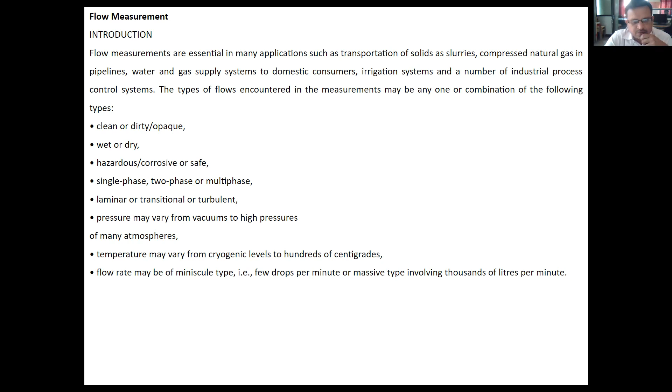The types of flows encountered in the measurements may be any one or combination of the following types: clean or dirty, opaque, wet or dry, hazardous, corrosive or safe, single phase, two phase or multi-phase, laminar or transitional or turbulent.

Pressure may vary from vacuums to high pressures of many atmospheres. Temperature may vary from cryogenic levels to hundreds of centigrades. Flow rate may be of minuscule type, that is few drops per minute, or massive type involving thousands of liters per minute.

Please mute your mic. Mhm.

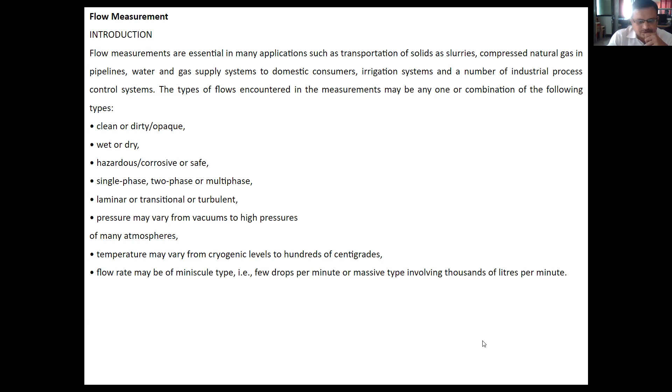Okay, this is nothing but flow rate. The selection of a particular flow measuring equipment depends primarily on the nature of the metered fluid and the demands of the associated plant. For example, an aircraft fuel meter requires to be compact and must not be affected by the changes in orientation, but has to handle only a clean and non-corrosive fluid.

On the other hand, many industrial flow meters have to work with fluids which may be corrosive in nature or may contain foreign matters, but the equipment may be relatively large and of fixed type. Additionally, the other factors that govern the choice of a particular flow metering device are the various performance parameters like range, accuracy, repeatability, linearity, dynamic response, type of output like analog, digital, etc.

Further, another requirement may be to indicate or record the rate of flow, total flow, or maybe both these quantities. Flow measuring devices generally fall into one of the two categories, namely primary devices or quantity meters and secondary devices known as rate meters. The distinction between the two is based on the character of the sensing element that interacts with the fluid flow.

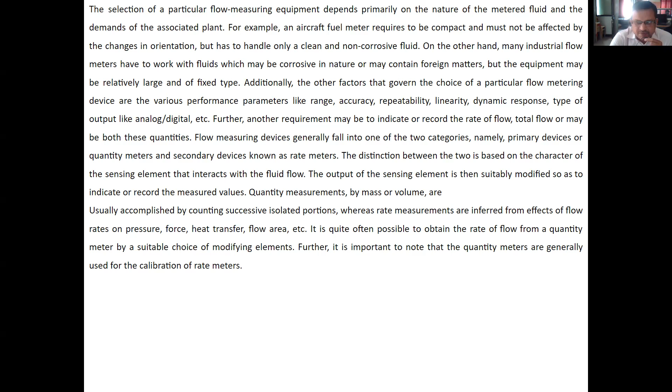Now, the first flow measuring device we will see is positive displacement meters. The term positive displacement meter is applied to a flow measuring device so designed that the metered fluid is repeatedly filled and emptied from a space of known volume. The principle of this measurement is that the liquid flows through a meter and moves the measuring element that seals the measuring chamber into a series of measuring compartments, each holding a definite volume.

Each element is successively filled from the flow at the inlet and emptied at the outlet of the meter. In other words, positive displacement meters chop the flow into pieces of known size and then count the number of pieces. Positive displacement meters are widely used in low flow rate metering applications where high accuracy and repeatability under steady flow conditions are required. Further, they are easy to install and maintain and have moderate cost.

These types of meters are generally used by the water and oil undertakings for accounting purposes. However, since there are moving parts in these devices, the wear of the components may alter the accuracy. Therefore, these instruments need calibration adjustment over an interval of time. Another limitation of such meters is their suitability to clean fluids only. Further, these devices are generally flow totalizers and do not give instantaneous rate of flow.

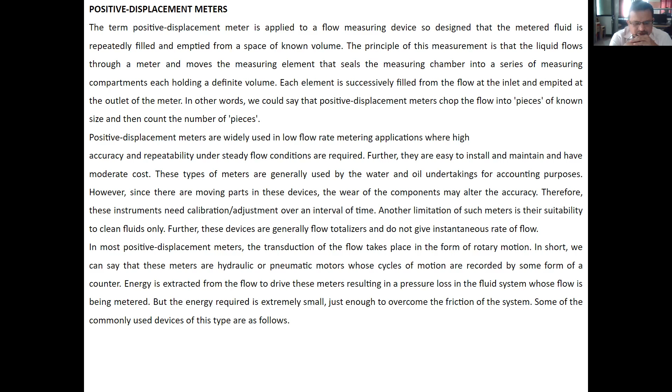In most positive displacement meters, the transduction of the flow takes place in the form of rotary motion. In short, these meters are hydraulic or pneumatic motors whose cycles of motion are recorded by some form of a counter. Energy is extracted from the flow to drive these meters, resulting in a pressure loss in the fluid system whose flow is being metered. But the energy required is extremely small, just enough to overcome the friction of the system. Some of the commonly used devices of this type are as follows.

This horizontal plate is there. It is going to be horizontal, and water will flow from this side to that side, or to the outlet side. Therefore, the nutating disc meter shown schematically in figure 5.22 consists of an eccentrically mounted disc which nutates or wobbles in the metering chamber which has spherical sides.

The liquid enters the left side of the meter alternately above and below the disc, forcing it to rock in a circular path while rotating about its own axis. Thus, the liquid from the inlet causes the disc to nutate before it goes to the outlet. Means what? What is happening? When the liquid enters, this disc is going to nutate, or it will start rotating about its own axis. That motion is also known as wobble motion. Wobble means it may be an eccentric type of motion.

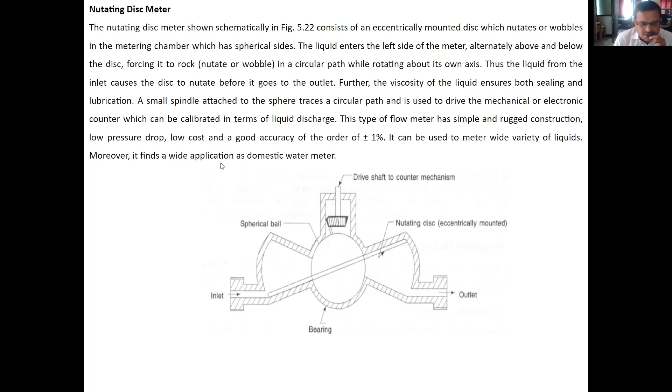The metered liquid entering the inlet revolves the rotor and the vanes around the cam, causing the vanes to move radially. The vane nearest to the inlet port begins to move outwards and becomes fully extended at point A, shown in figure. The vane ahead at point B is already fully extended, and thus a measuring chamber of known volume is formed between the two vanes and the meter body.

A continuous series of chambers at the rate of 4 per revolution are formed, which deliver the flow at the outlet. This type of meter has low pressure drop and can give an accuracy of the order of plus minus 0.2% of the measured values. An important application of the sliding vane type meter is its use as a positive displacement pump, which can cause the flow rate and measure it simultaneously. Such a pump is routinely used for dispensing petrol, diesel, or compressed natural gas in fuel filling stations.

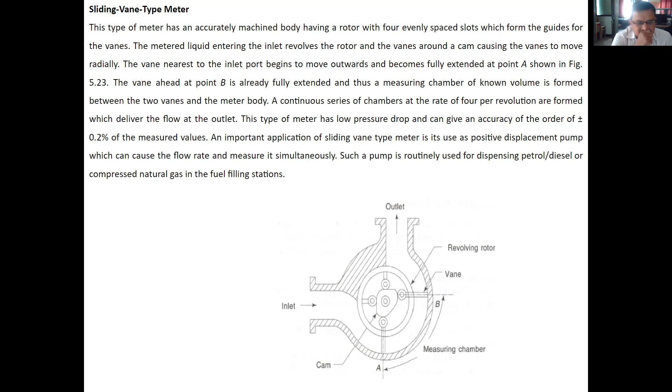The incoming fluid is trapped between the two rotors and is conveyed to the outlet as a result of the rotation of the rotors. For every rotation of each rotor, the swept volume corresponding to twice the area A, shown in figure, is passed through the meter. Thus, the number of revolutions of the rotor gives an indication of the volumetric flow. Since the speed of rotation is proportional to the volume flow rate, the rate of flow display can also be obtained by monitoring the speed of rotation of one of the rotor shafts.

The rotations of the lobed impellers can be monitored by magnetic or photoelectric pickup. The frequency of the output is proportional to the flow rate, and the electronic integrating circuit gives the totalized flow. Alternatively, the rotations are counted by connecting them to mechanical registers. Meters of this type are available for pressures up to 60 atmospheres for flow rates ranging from 10 to 10,000 cubic meters per hour. Within these flow rates, the meters have an accuracy of plus minus 1% over a range of 10 to 100% of the rated capacity. Further, these meters have low pressure drop of the order of 50 mm of Hg at the rated capacity.

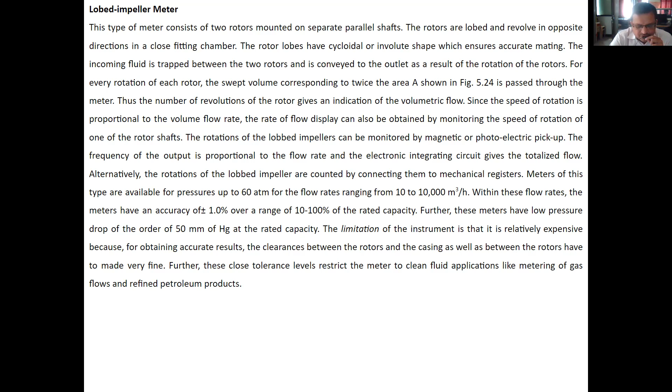The limitation of the instrument is that it is relatively expensive, because for obtaining accurate results, the clearances between the rotors and the casing as well as between the rotors have to be made very fine. Further, these close tolerance levels restrict the meter to clean fluid applications like metering of gas flows and refined petroleum products. So, this is the lobed impeller meter. Now, special methods. We'll see these special methods and then we'll stop.

There are certain flow measuring devices that cannot be strictly categorized as fluid mechanical types of primary flow measuring devices or the indirect type of rate flow meters. Therefore, these are discussed as special type devices where the principle of operation is generally non-fluid mechanical in nature. For example, ultrasonic time delay technique, electromagnetic effects of fluid flows, heat transfer from heated wires, Doppler frequency shift of scattered light, etc. are some of the principles used in the measurement of fluid flow parameters.

Ultrasonic flow meters. The operating principle of this type of instrument is based on the apparent change in the velocity of propagation of sound pressure pulses in a fluid with a change in velocity of the fluid flow. In practice, we employ short bursts of sinusoidal pressure pulse whose frequency is above the audio frequency range, that is above 20,000 Hz. A typical frequency may be of the order of 10 megahertz, that is 10 raised to 7 Hz. Here 7 has been written, sorry.

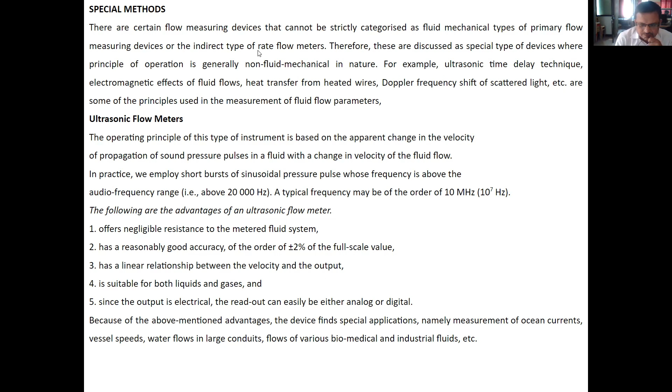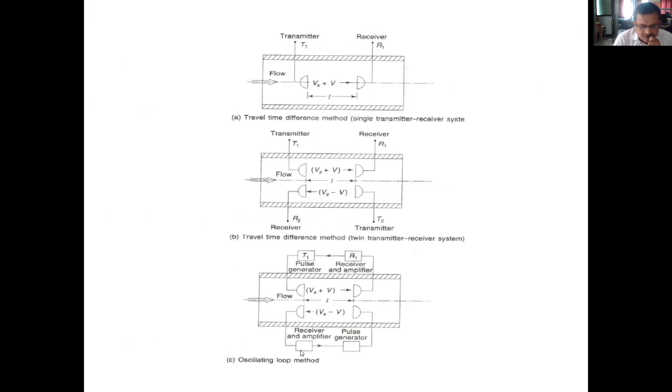In the electromagnetic flow meter, rate of flow may be determined for electrically conducting fluids by measuring the EMF induced across the fluid stream when it passes through the magnetic field. This technique cannot be used for electrically non-conducting fluids like gases. However, it gives quite satisfactory results for fluids with as low conductivity as water. The principle of operation of the unit is directly analogous to Faraday's law of electromagnetic induction for solid conductors.

The law states that whenever a conductor cuts lines of magnetic field, an induced EMF is generated, and the magnitude of this EMF is proportional to the rate at which these lines are cut, and the EMF is perpendicular to the plane of conductor and the magnetic field. The direction of the induced EMF is given by Fleming's right hand rule.

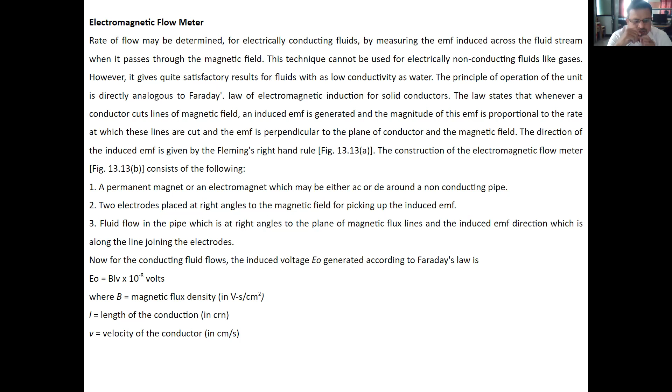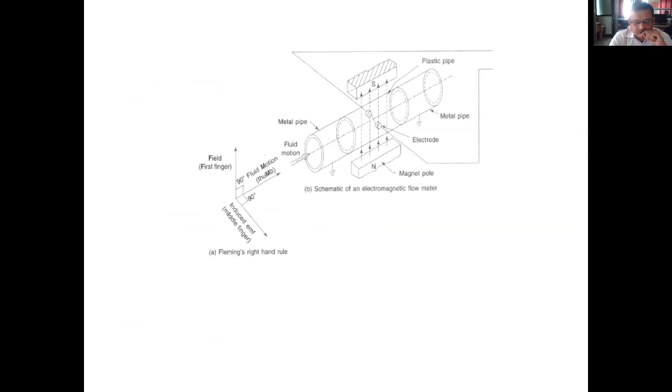Now for conducting fluid flows, the induced voltage E naught generated according to Faraday's laws is E naught equal to BLV into 10 raised to minus 8 volts, where B is the magnetic flux density, L the length of the conductor, V the velocity of the conductor. This is the electromagnetic flow meter, Fleming's right hand rule. The effective length of the conductor corresponds to the inner diameter of the pipe, and the velocity of the conductor is proportional to the mean flow velocity.

The volume flow rate of the circular pipe is given by Q equal to pi by 4 d squared V. E naught is equal to 4 BQ into 10 raised to minus 8 divided by pi d volts. This shows that the volume flow rate Q is directly proportional to the induced EMF E naught as long as the flux density remains constant.

The EMF is measured by means of two electrodes built into the non-magnetic length of pipe. Further, these electrodes are made to be completely flush with the inner surface so that they do not obstruct the flow and at the same time are in direct contact with the flowing fluid. Unfortunately, the EMF generated by the instrument is very small, typically of the order of 1 millivolt for a fluid velocity of 1 meter per second, and the resistance of the fluid is often very high. Therefore, the output of the instrument is generally amplified suitably.

In practical equipment, an alternating magnetic field is usually preferred. The main reason is that it prevents polarization of the electrodes, that is, collection of gas bubbles on the electrodes due to electrolytic action, which form insulating pockets in the vicinity of the electrodes. The main advantage of the electromagnetic flow meter is that it causes no obstruction in the flow line of the metered fluid. This makes it particularly suitable for fluids containing solid matter. Further, the device is quite accurate and has a wider linear range with good transient response.